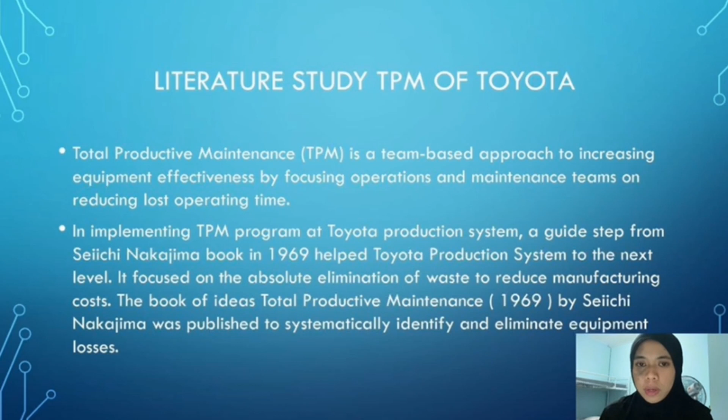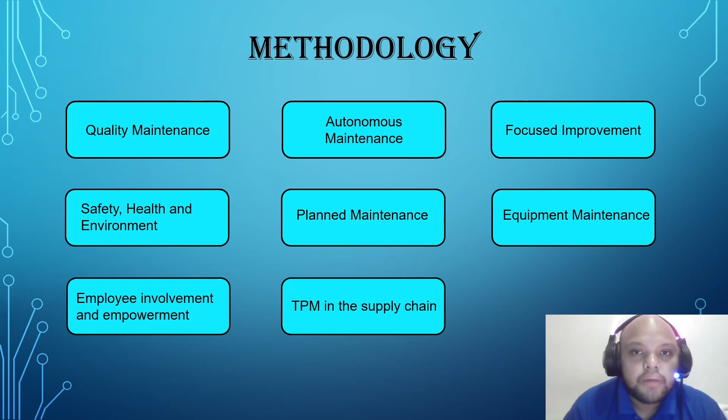There are 12 Nakajima steps in TPM. Step 1, announce the management decision to introduce TPM. In 1969, Mr. Seiichi Nakajima made a discussion with his teammates and top management to introduce TPM. He also did much research and study about total productive maintenance to make sure the Toyota company makes profit and gets stable day by day.

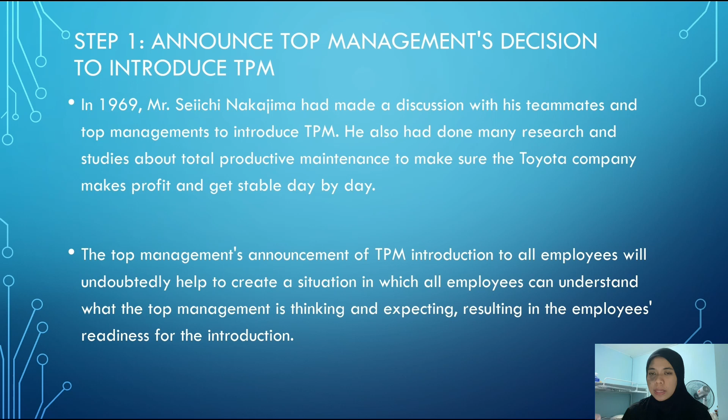Step number 2, introductory education and campaign of TPM. Toyota company selected some technicians and engineers to attend the education campaign. This education campaign helps them understand what TPM is and how TPM will help their company get stabilized. TPM aims at restructuring the corporate culture through improvement of human resources and plant equipment.

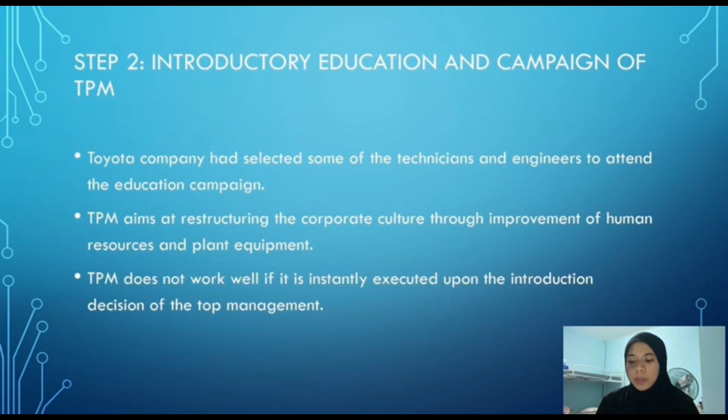The aim of TPM introductory education for each working level of employees is to have all employees fully understand the purpose of TPM and to provide them with a TPM language to heighten their spirit towards TPM. TPM does not work well if it is instantly executed upon the introduction decision of the top management.

Step number 3 is create organizations to promote TPM. Top management or the engineers who had attended the education campaign did some promotion via newspaper, advertisements, posters, and articles to promote TPM within the Toyota company, to make sure all staff and employees know about it. Toyota spread TPM throughout its organization by involving all employees in equipment maintenance and improvement.

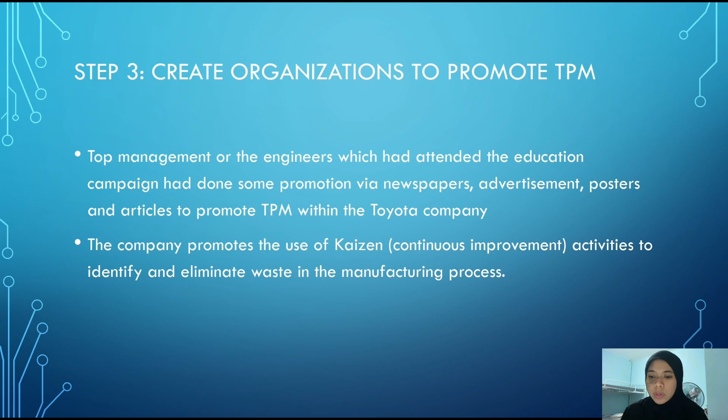The company encouraged all employees to participate actively in the TPM process and provided training and education on TPM concepts and tools. The company promotes the use of Kaizen activity to identify and eliminate waste in the manufacturing process. To manage and oversee the implementation of TPM, Toyota has a TPM office which is responsible for the implementation and management.

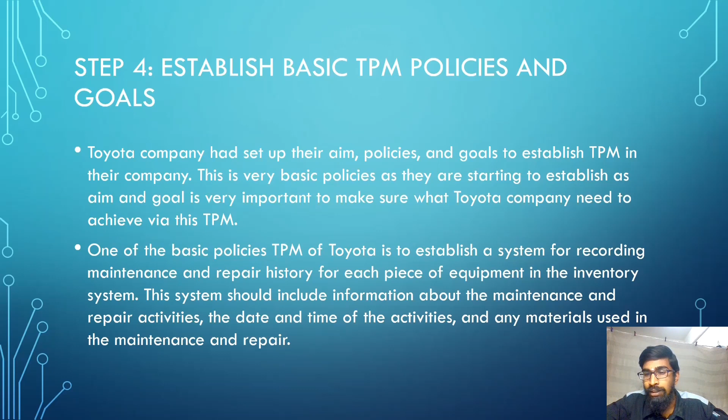One of the basic TPM policies of Toyota is to establish a system for recording maintenance and repair history for each piece of equipment in the inventory system. This system should include information about the maintenance and repair activities, the date and time of the activities, and any materials used in the maintenance and repair.

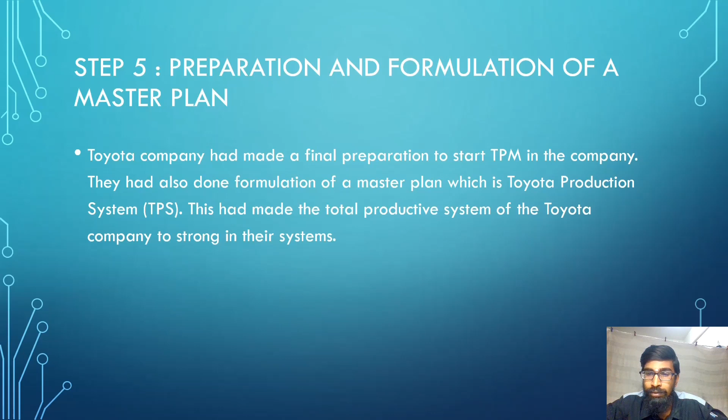Next is step 5, which is preparation and formulation of a master plan. Toyota Company had made a final preparation to start TPM in the company. They had also done formulation of a master plan, which is the Toyota Production System (TPS). This had made the total productive system of the Toyota company strong.

Next is step 6, which is TPM kick-off. The main kick-off to TPM should take the form of a formal presentation with the employees attending. The top management publicly announced the implementation of TPM within the company Toyota. They also communicated the same to several stakeholders like clients, merchandisers, and several statutory and non-supervisory bodies.

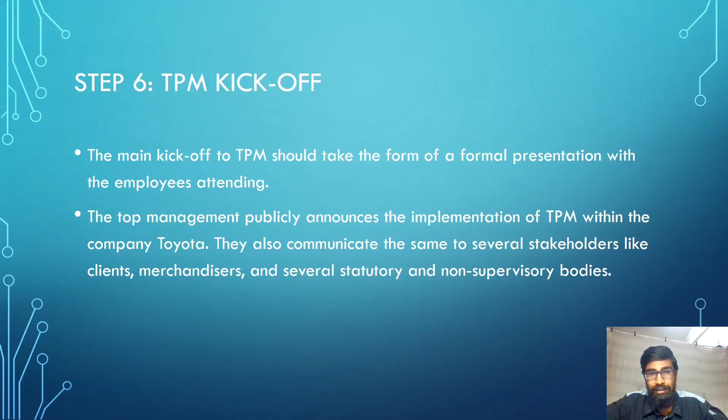Thank you. So step number 7 is develop an equipment management program. An equipment management program is a system used in an organization to monitor and maintain its assets. This can include items like machinery, tools, and other tangible assets such as cars and trucks, and the tool is made to assist the business in keeping track of the use and upkeep of the equipment as well as in making plans for upcoming purchases and replacement.

Step number 8 is develop a planned maintenance program. A planned maintenance program is a schedule of routine checks, upkeep, and fixes done on asset equipment to keep them in excellent operating order. The program assists in reducing equipment breakdown and increasing the asset lifespan. This program typically includes a regular schedule such as daily, weekly, monthly, or yearly, depending on the equipment and its usage.

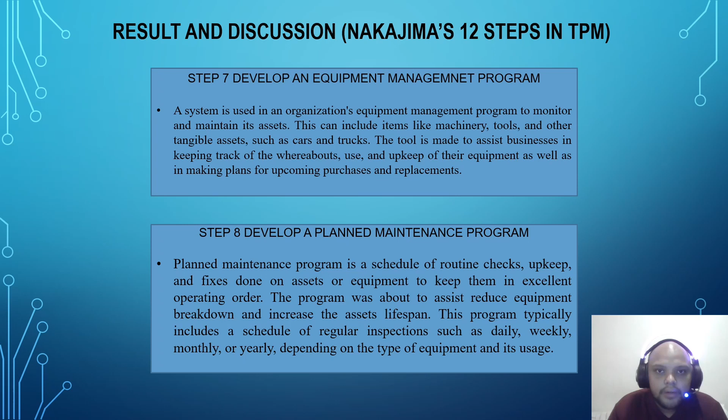As for step number 9, which is the development of an autonomous maintenance program. Autonomous maintenance is a type of total productive maintenance designed to improve the reliability and performance of equipment and the process. In this method of preventive maintenance, the operators of the equipment take responsibility for the proactive maintenance of the equipment. This can include doing routine inspection and cleaning as well as performing minor fixes and modifications.

And step number 10 is increased skill of production and maintenance personnel. The fourth TPM development activity, and the 10th phase of the TPM development program is improving operational and maintenance capabilities. It's more like training and education, which are investments in individuals that have various benefits when implementing TPM. A business needs to spend money on employees to help the staff members manage their equipment assets.

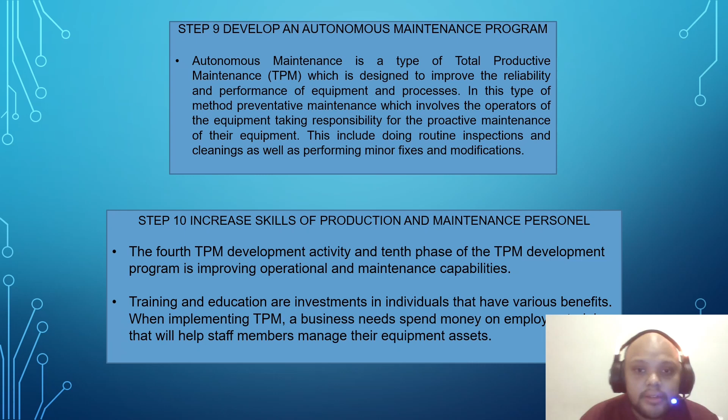Step number 11 is develop an early equipment management program. The last category of TPM development activity is early equipment management. Even though the design, construction, and installation of new equipment appear to have gone without a hitch, problems usually arise during testing, running, commissioning, and startup. Most engineers and maintenance personnel might need to make a few changes before normal functioning can resume. Even then, it might be difficult to perform the initial lubrication, inspection, and repairs needed to halt breakage and deterioration. As a result, even a minor problem results in protracted, unneeded equipment downtime.

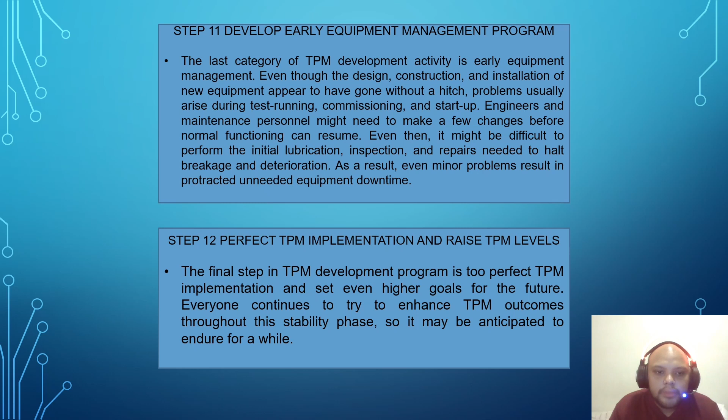And lastly, step number 12 is perfect TPM implementation and raise the TPM level. The final step in the TPM development program is to perfect TPM implementation and set even higher goals for the future. Everyone continues to try to enhance the TPM outcome throughout its stability, and it might be anticipated to endure for a while. So that's it from me.

And now let's look at the conclusion. In a nutshell, the Toyota Production System was one of the first systems to solve design and manufacturing issues. The mechanical development of automated devices is the most important part of the system. Toyota Company believes that machines cannot be created by themselves. That is why human effort is important. Each element of the production process is consistently improved until it achieves perfection.

The Toyota Production System has always been one of the main reasons behind the success of Toyota Motors. It has also helped the Toyota Company in many ways, such as effective relations with suppliers, well-structured, timely delivery to customers, and good quality of products. Many companies have tried to implement this system in their company, but they failed.

Other companies' failure to understand and identify the Toyota Production System has given Toyota Company an added advantage. This has also made Toyota Company a successfully running company with profits and low risk of loss until now and forever.